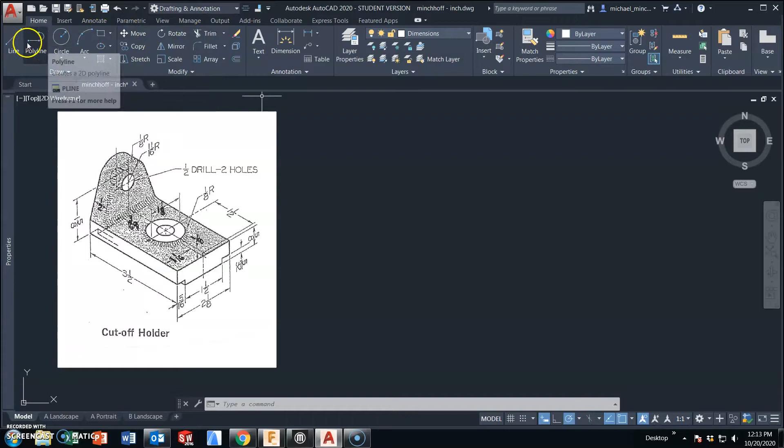So in terms of getting overall height, it's mathematically difficult to get, at least in my mind. Not that you couldn't add 5/32 plus 1 5/16 plus 11/16. Personally, I don't feel like doing that math. And if you let the program drive the math for you, you'll be better off.

So in terms of starting this one off, in the rare instance, I would start by creating a rectangle for the base in what will be the right side view.

So I have an overall width of 2 1/8 and an overall height of 5/8. So I can key this in. 2-1/8 is my length, and my height is 5/8.

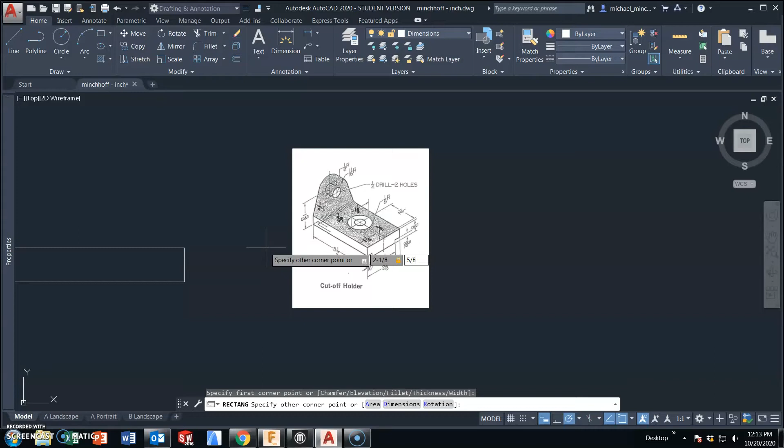Being that this is a rectangle and I'm going to modify it, I will explode to make these 4 individual lines. Next, I have this small rectangle.

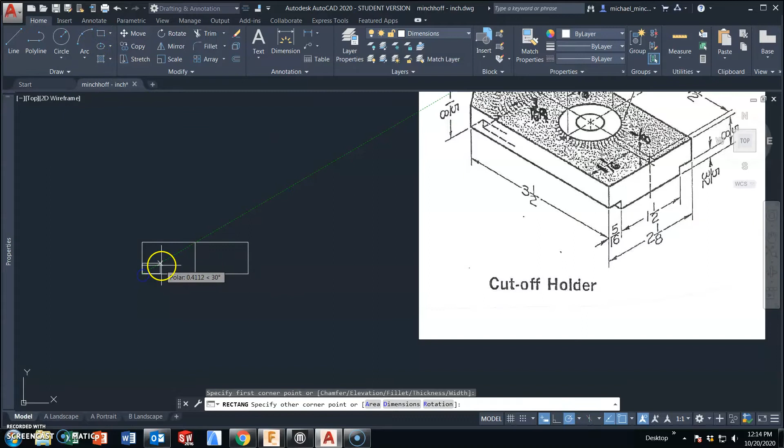The fact that it is symmetrical may lead me to mirror this. So I'm going to do so. And I'm going to now add in a rectangle that is 5/16 in length and 5/32 in height.

And I'm going to first off explode this, and then I'm going to mirror these 2 entities to the opposing side. And yes, I want to create a copy.

So just to make life easier in the long run, I'm going to shrink these lines. So there's a cross section of my base material.

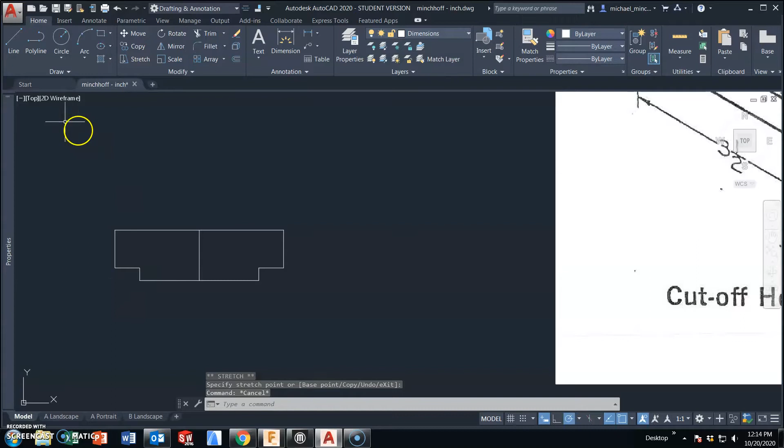Being that this measurement vertically is from this edge, and it is in the center, I am now going to measure up 1 5/8, and this will give me the center.

And if I draw a diameter circle, I could put in 22/16.

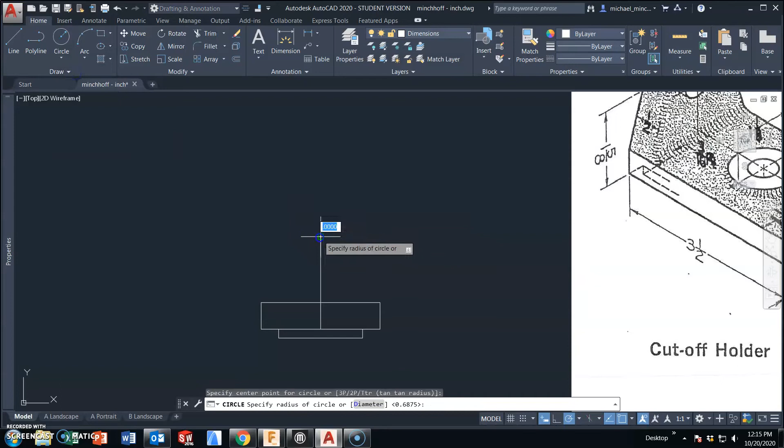Being the fact that you can create a radius circle, you could put in 11/16 and be fine, and the drill diameter is 1/2 inch. By using the 1/2 inch circle and staying with the diameter circle tool, that was the suggestion for doing 22/16.

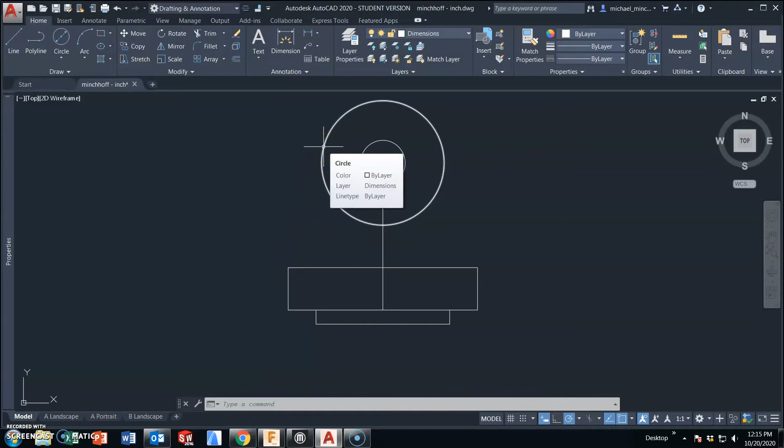So this has now set my overall height. In terms of creating tangency, if I start at this vertex, I will see that my cursor changes to this circle with a line on the outside, and it's saying that it's tangent. This is the relationship that I am looking for.

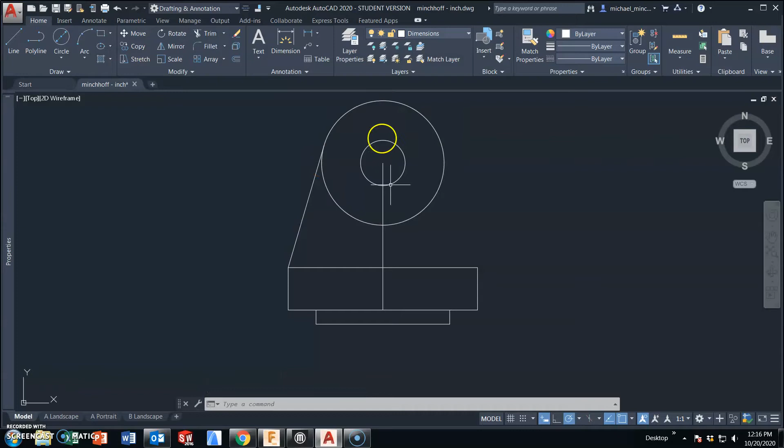It is not on what's known as a quadrant point. Every circle is divided into 4 quadrants at 90-degree increments. It is not to the quadrant point. It is to a point of tangency.

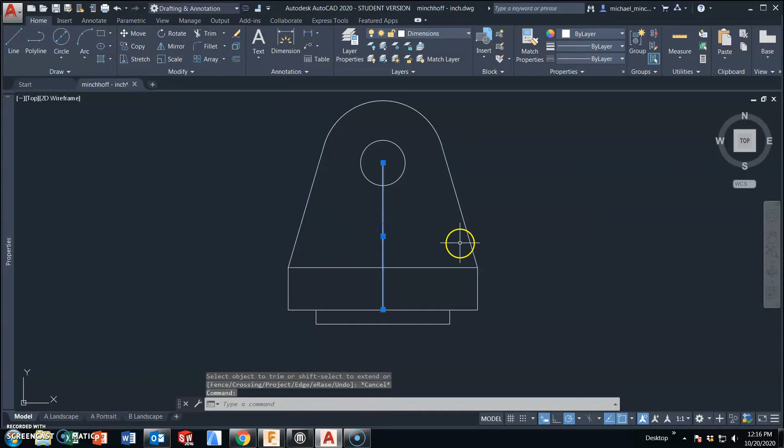So there is actually no edge here. This will require a trim function, and this is most of my front view. All I have to do is add the boss.

In terms of projecting to the other views, I'm going to stick with a 1.5 spacing that we've been using for our inch parts, and I have an overall length of 3.5.

Again, height, now that I have used all my radius dimensions, I'm going to come over 1/2 inch and drop this straight down.

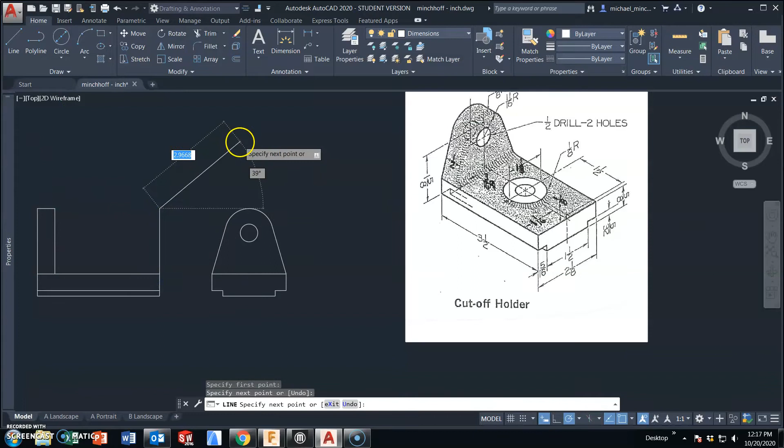And there is an object line that would run here, and this object line is going to trail back. So other than the boss and some hidden lines for holes, which I don't have yet from the top because I want to project them all at one time, structurally I have a majority of the front view complete.

Sticking with my 1.5 inch line spacing, projecting that information, and I am setting a width of 2 1/8, and we're just going to run this right back around. Being that it is tangent, there are no object lines at points of tangency.

So on the top, I do have this object line that is that vertical face, and I have 2 hidden lines that will project all the way across. I could mirror this, probably take me longer to mirror it, but these will be hidden lines. So for right now, I'm going to set these to be hidden too.

All I have left is the boss and the holes in terms of projection. Being that both holes are the same diameter will save you a little bit of time here. Find the midpoint, measure in, which is 1.5, and I have 2 circles that are concentric, a 1/2 inch diameter and a 1 1/8 diameter.

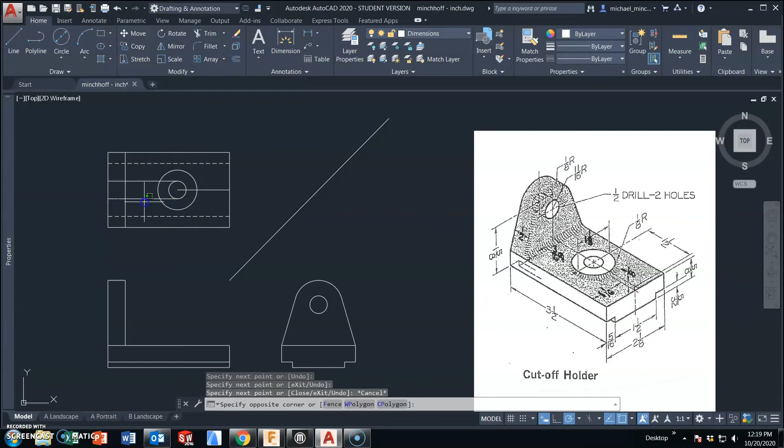So being that these holes are centered, I don't have to project all the way around. I can just project right off this other 1/2 inch circle to create center lines for this hole. Sorry, hidden lines. I do need a center line. And this one will be the center line, and it will extend out past the object.

So we have done this process before in the fact that these holes are all the same. They're all 1/2 inch holes. So if I take the time to set hidden lines and center line construction, I can copy and rotate as long as I have placement references. I can line these up on another view. So I am going to take the time now to do that.

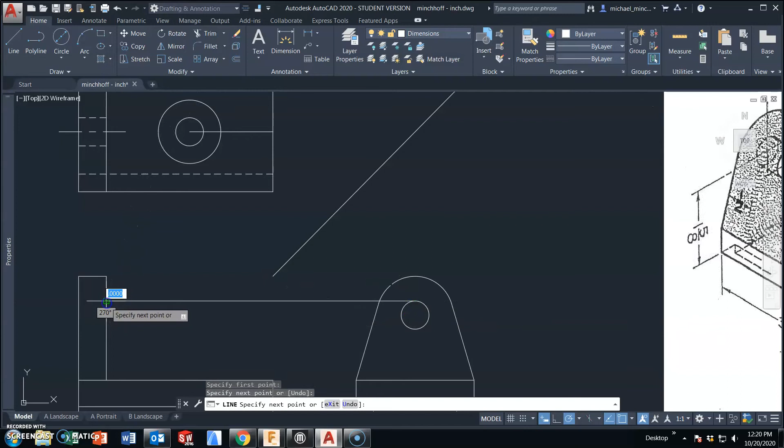The top of the circle, the side of the circle. So if I take this 1/2 inch hole, I'm going to copy one straight down. I'm also going to copy one so that I can rotate it. I do need a line projection here. This one's going to be a little short because this base thickness is thicker than 1/2 inch, but I am now going to rotate this 90 degrees.

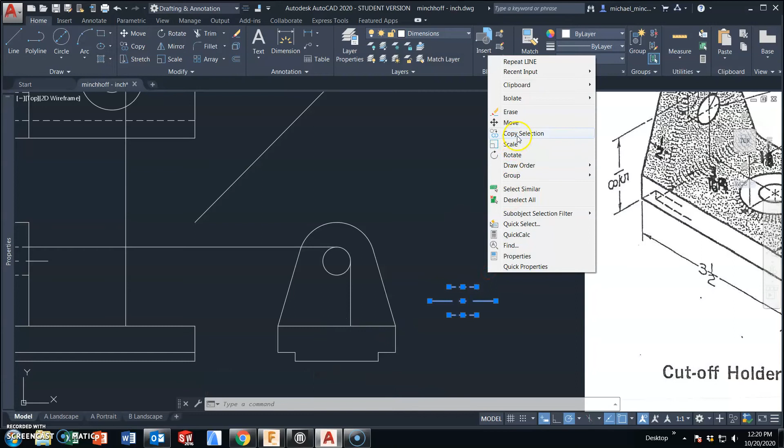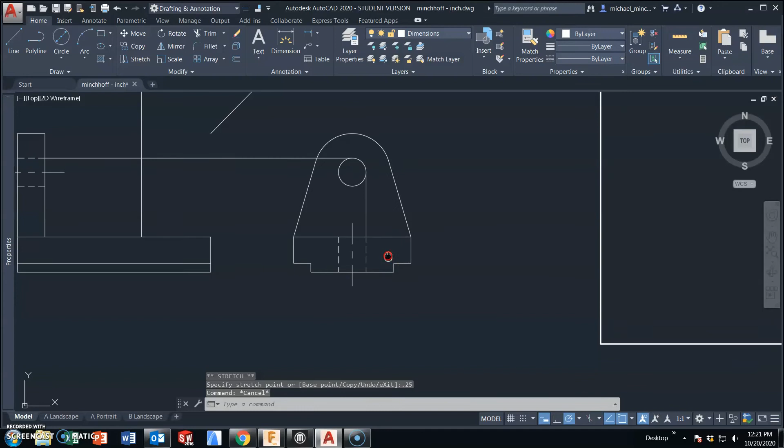And use what I can, move it. So my center line is not centered, so I do have to make the adjustment here. My pattern should show back up. And being that this is the same thickness, I'm going to copy a section here.

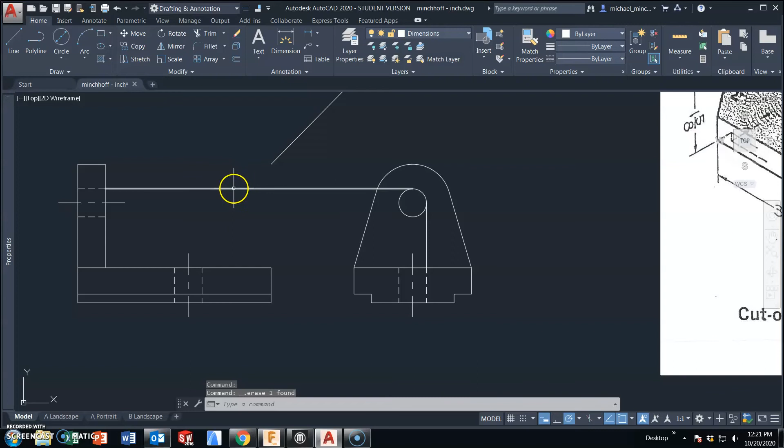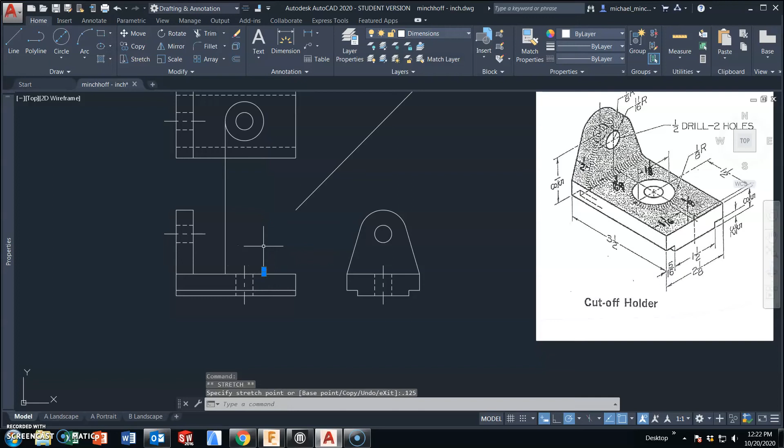And let's be a little more efficient here. Let's do this one time correctly the first time, so we don't have to adjust it again. Oh, I might as well copy the fillets over too. This is going to get fillets. There are casting fillets, they're 1/8 inch. Radius, enter. 1/8, enter. And that's going to take place here.

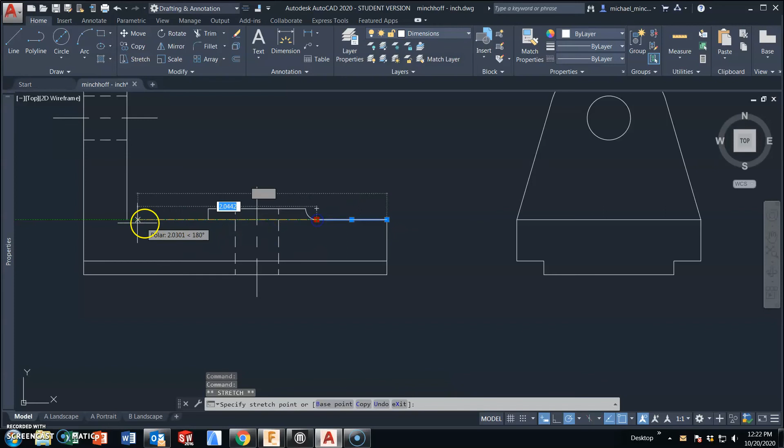This is just a byproduct of AutoCAD. Since they are the same size, I don't have to readjust. Since I'm putting in fillets, I do have a couple more. An 1/8 inch fillet right there. Actually, that will be it for the 1/8 inch fillets.

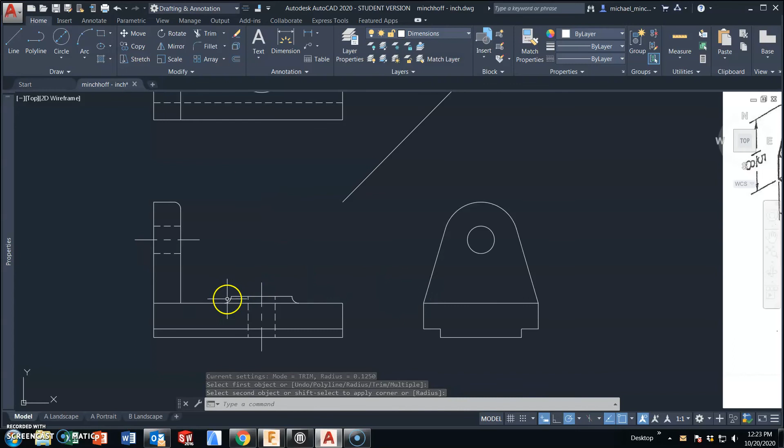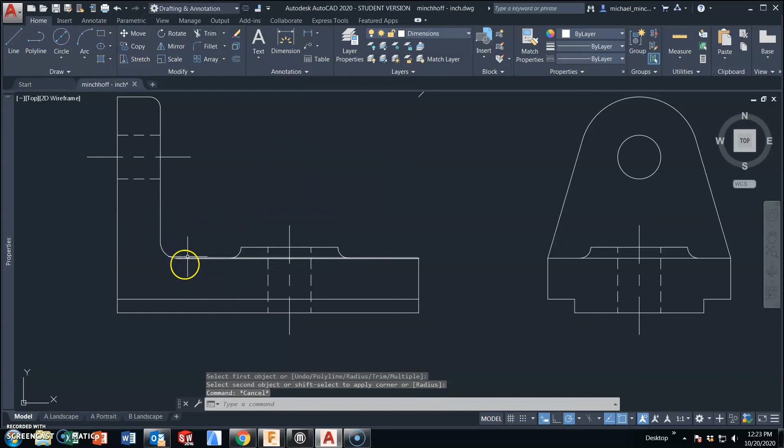So working more efficiently this time, I'm going to take all of this information and copy it to the center. I do have a 3/16 fillet that happens between this vertical and horizontal section. It is a radius, it is 3/16 for this one, and it takes place here. We do have to stretch that line again. But that should do it.